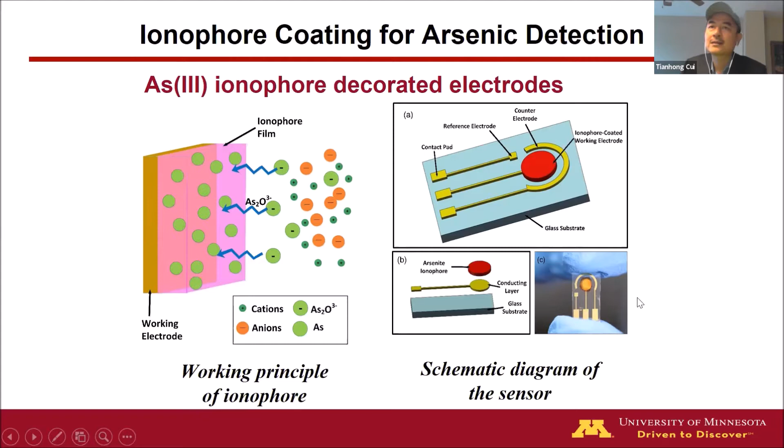We also built a smaller instrument connected to the sensor, which realizes wireless communication. We can put it in a set of water to detect and transmit the signal wirelessly, and then from a terminal like a computer remotely, we can get the signal from the lakes, rivers, or underground water, trying to check the arsenic concentration. My student and postdoc have been working on that.

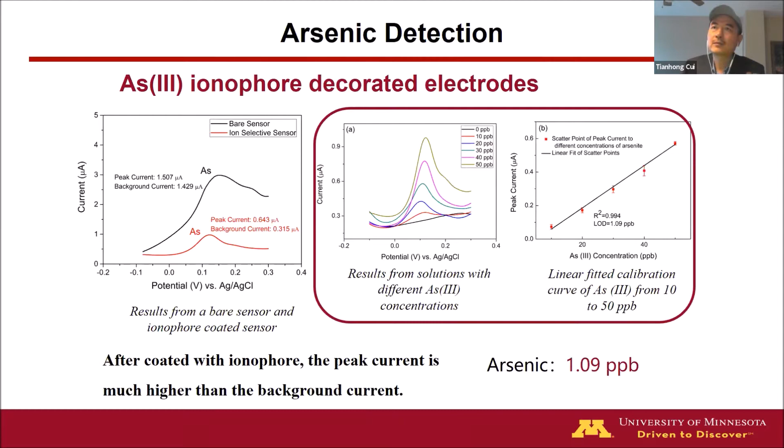We also develop sensors to detect lead and cadmium. This is especially relevant in the Midwest United States - there was a big problem in the past in Michigan, where about 500,000 people got affected because of lead release from the pipeline.

In our lab, we also do mercury detection. We did a lot of work because of a local problem in Minnesota, where mercury contamination in water is actually very severe. Mercury detection limit requirements are much lower compared to other heavy metals, and this is regulated by the EPA, so we need to try to get very good sensors for water detection.

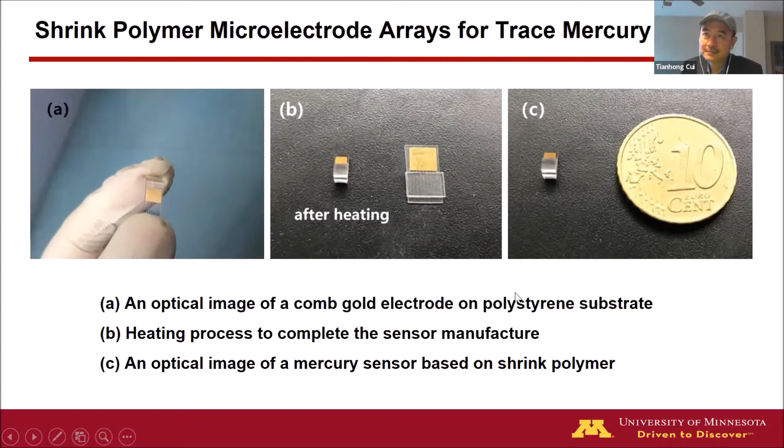Using this, we can do the detection. It gives us a few orders, 2 orders, lower detection limits. We can detect 90 ppt, that's parts per trillion detection limits. This is a very, very low detection limit that we can achieve for mercury using this technology.

Not only for mercury, we can also develop it for arsenic if needed -- we can detect very low concentrations using the sensor. This is actually something we've been doing for many years in the past.

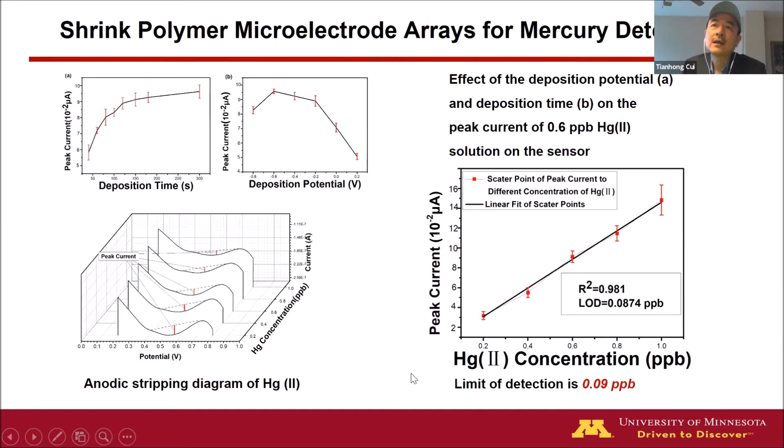In Minnesota, in addition to the Water Resources Center, we also have one of the best facilities, the Minnesota Nano Center, for micro/nano fabrication. It's one of the earliest and one of the best, sponsored by the National Science Foundation. A lot of local industry in Minneapolis uses the facility, and other academia, universities and research institutes also use it.

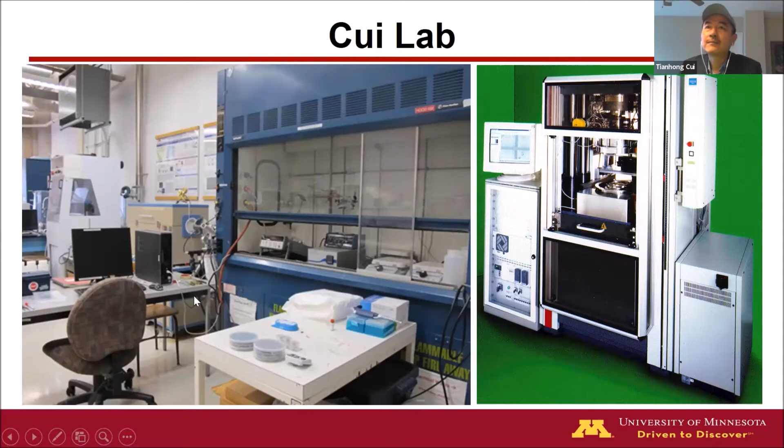So with this, I'd like to conclude my talk today. I think I may have a couple of minutes for questions. I'll get back to Kevin. Thank you very much for your attention.

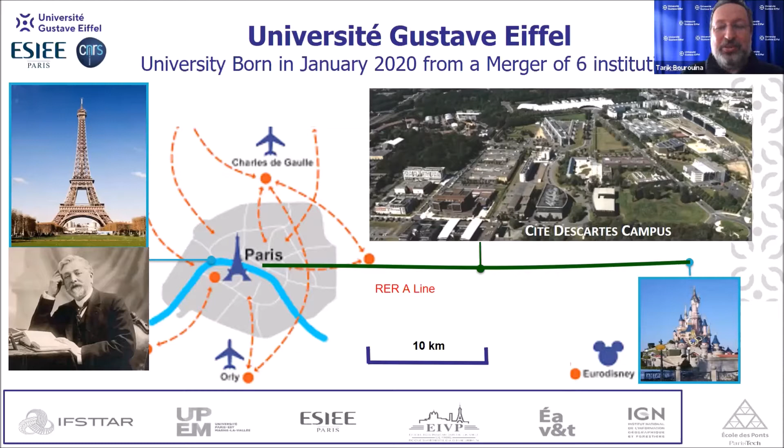I mentioned in my presentation that there are a couple of projects under the Future label, and Future stands for French University on Urban Research and Education. It received the I-SITE label, a national French program of excellence, and our flagship is inventing the city of tomorrow.

In a few words, the 3 pillars of our strategy are to contribute to the resource-efficient city, the safe and resilient city, and the smart and digital city. So there are a couple of interesting questions and a lot of opportunities for deep technologies, including micro and nanotechnologies.

We do have on our campus 2 world-class experimental platforms. One of them is dedicated to MEMS and nanosensor prototyping, the so-called SenSYS Connect IoT platform. On the other hand, we have a quite unique district-scale climatic chamber called Sense-City, which allows us to conduct experiments under controlled climatic conditions.

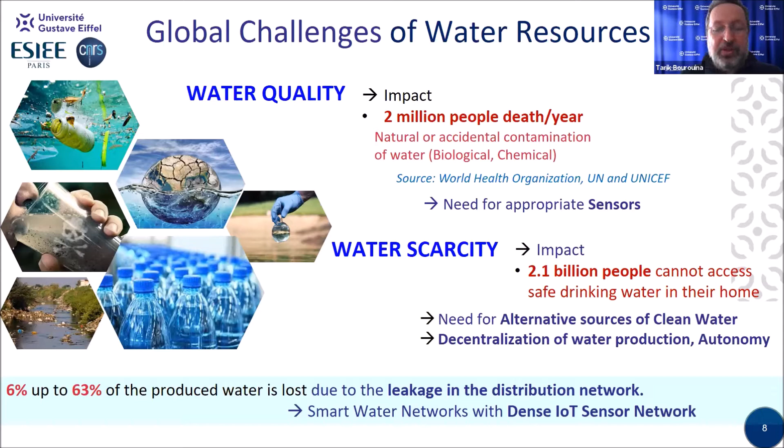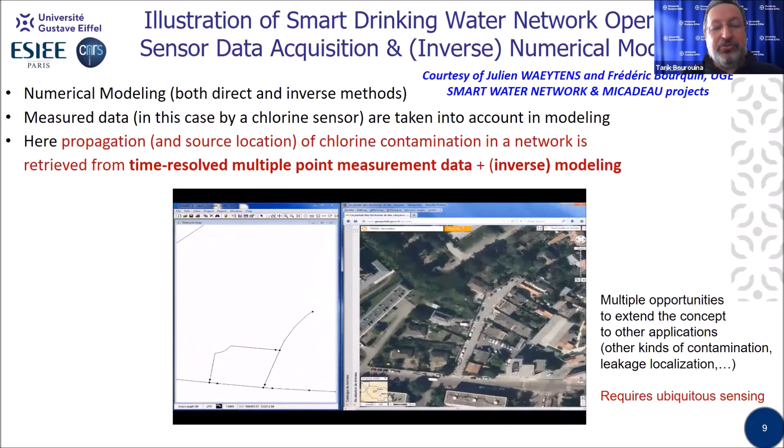So I'll give an illustration about what we can do. Just to give you a first illustration about the smart water network, consider a drinking water network. All the dots here, schematic dots, are sensors. Suppose you are able to put sensors everywhere along the drinking water network—here we take the example of chlorine sensors.

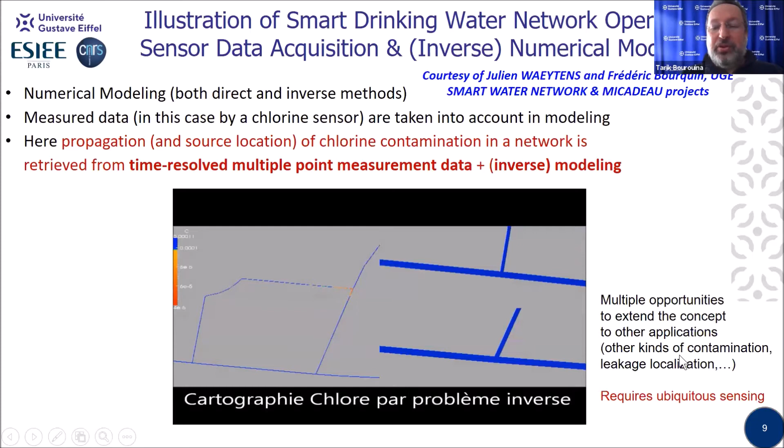By the use of data collected throughout the network, you'll be able to reconstruct the pollutant map. It can be time-resolved, and a water manager, looking at this kind of interface, can, for example, close the water here to avoid this chlorine contamination spreading through the water network. There are multiple opportunities to extend this concept to other applications, like contamination from other kinds of contaminants, and even the localization of leakage.

There was a European project just ended named Proteus, and the challenge was to develop multifunctional miniaturized sensors based on nanotechnologies. The goal was to provide a 25x reduction in cost, a 10x reduction in size, and multiple other capabilities.

Just to make it short, we came out with this unique sensor which is able to measure up to 9 different parameters. 4 of them can be very helpful, for example, to detect leakage: pressure, flow rate, temperature, and conductivity. Temperature is actually needed for all sensors, just for calibration purposes. Conductivity can be an indicator of contamination, and when we need to know exactly what this contamination is, there is a need for chemical sensors—so 9 parameters on a chip no more than 1 square centimeter, with a potential for cost reduction.

Just to give you an idea about the power of those microtechnologies: here, this is a single chip mounted on a sensor. Those kinds of chips can be produced using batch fabrication technology, so 20 wafers of these can provide you up to 1,000 chips, and then 1,000 sensors.

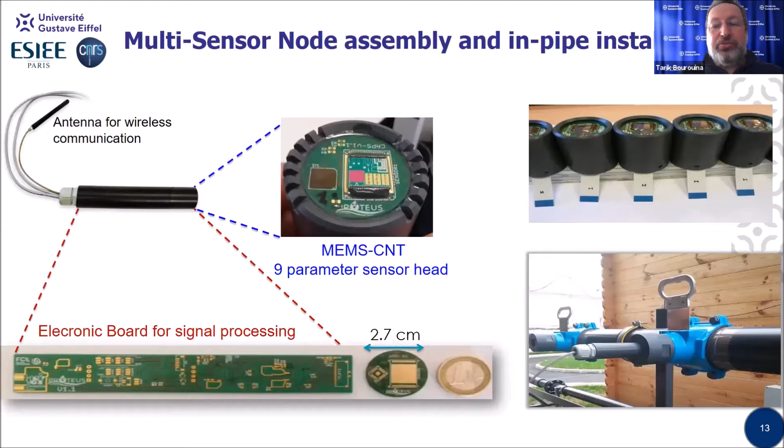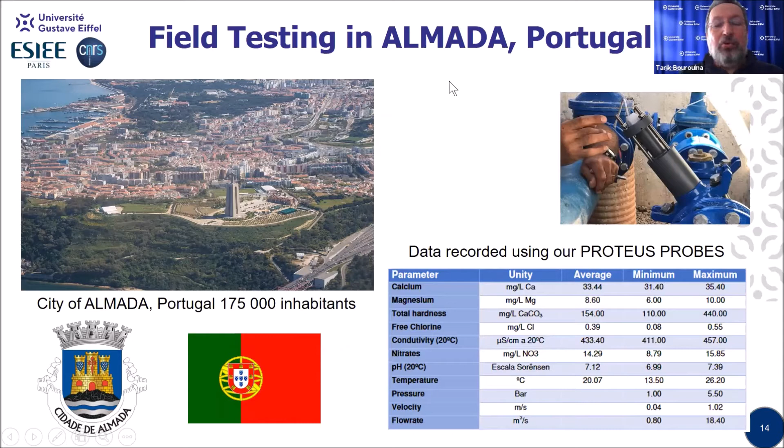So it's ease of deployment over a water network. In this project, we produced a lot of those sensors, and then we made the field testings. One of those field testings was conducted in Portugal, in the city of Almada, for the proof of concept and improving the TRL of this technology.

So I'll switch to a completely different topic, which is water contamination, not by chemicals. Up to now, we saw a lot of chemicals that are miscible in water. Here, the point is about particulate contamination, which includes biological particles and plastic particles. Among the biological particles, there's a need and opportunities regarding bacteria, but also protozoa. For plastic particles too, this has recently raised a lot of concerns, and we tried to address this issue.

From a technology point of view, when you consider micro technology, microfluidics, and so on, there's an opportunity when you look at the characteristic size of bacteria and protozoa. They lie between 1 micron and 10 microns in dimension. Viruses, though, are really a challenge—if you need to consider them as particles, that's definitely another story.

But for bacteria and protozoa, one attempt was to actually capture those bacteria in a kind of mechanical filter in a microfluidic channel, and then observe those bacteria through a microscope while mixing the fluid surrounding the bacteria with very well-known liquids. The idea is to match the contrast when doing this mixing, so as to achieve a perfect match.

So then the next topic is protozoa. They are much bigger than bacteria, and can be observed through microscopes or other imaging techniques. As you can see here, we have different types of protozoa like Crypto and Giardia, and images of other contaminants which are non-biological.

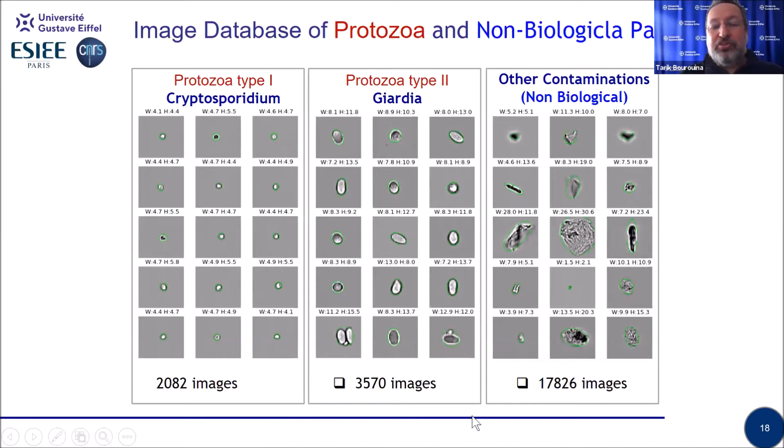So here we can understand that there's room for identifying and recognizing these types of biocontaminants, just like we're able to recognize the difference between a dog and a cat. Here we'll be able to recognize the difference between Crypto and Giardia just through proper observation and image processing.

This is what has been done with a colleague from NTU in Singapore, and with contributions from other French colleagues who are experts in image processing and deep learning. The idea was to collect a large number of these particles using an instrument widely used in biology for cell screening, called flow cytometry. It's used for cancer cell screening, blood cell screening, and so on.

But here we just exported this technology and used it for water analysis. And the particles here are no longer... actually they are cells, biological cells. And we're able to construct a huge database. Through learning techniques, we're able to establish clusters to identify whether it's Giardia, Crypto, or non-protozoa particles.

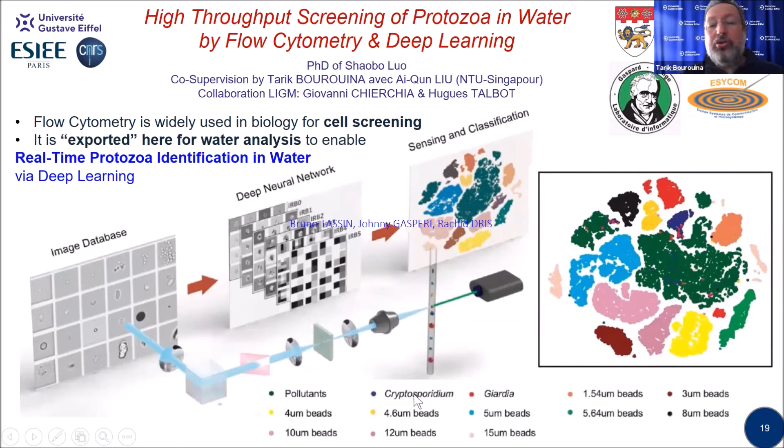Okay, so the next topic is microplastics. There are recent reports showing that bottled water actually contains a huge amount of microplastics, much more than tap water. This raises concern about whether it might impact health or not. Those reports are totally ignoring the smallest particles, those below 10 micrometers in size, which suggests the number could be even much bigger. So this is also an opportunity for us.

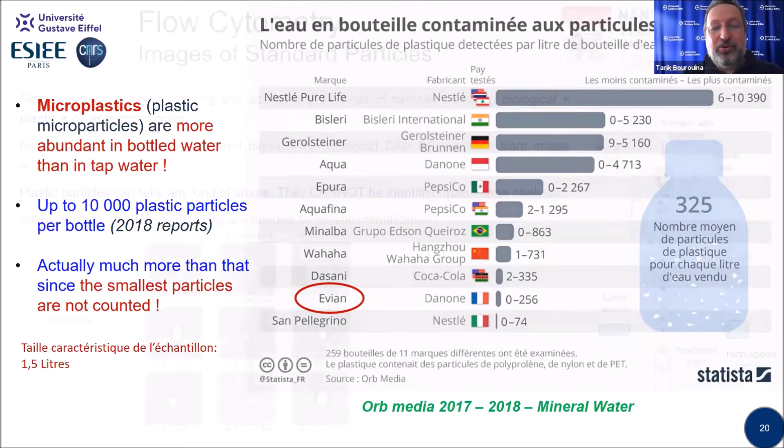But contrary to biological contaminants, we cannot recognize plastic just by looking at it, because plastic can take any shape. You can't tell, okay, I recognize this as plastic according to its shape. So there's a need for an alternative identification technique. We can count the particles, but we can't identify them like we did with biological contaminants. So this identification is done through optical spectroscopy.

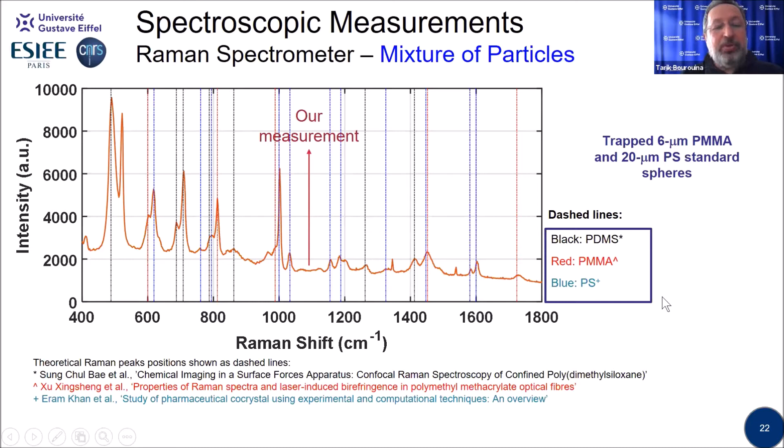If we are able to implement optical spectroscopy, then we will be able to tell, okay, this is a characteristic spectrum of polystyrene or PMMA or PDMS, and this is what we used. Either Raman spectroscopy or FTIR spectroscopy can be very useful for this identification. So that's what we did.

So we used a microfluidic chip in order to concentrate all the particles so that they all gather in this reservoir, no more than 90 micrometers in size. And just by spotting here, we were able to see the nature of those particles, to tell whether

it's plastic or not and which type of plastic they are. There are also multiple capabilities that can be implemented in a microfluidic chip, like size sorting. So we get a series of reservoirs, and each of them will be related to either small particles or big particles. And then again, we'll be able to analyze by spectroscopy to tell what particle it is for the bigger and what particle for the smallest.

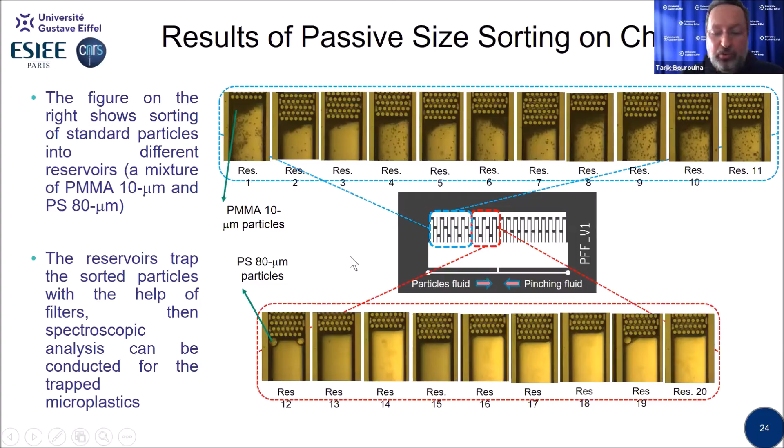There is also a spin-off company that emerged from the university. It's called Isonics, and it just launched a few months ago.

If I may have time, I'll just speak a little bit about water purification that was mentioned by Professor Tianhong Cui. So we implemented a couple of techniques. One of them is photocatalysis. And this was just a demonstration of

integrating a nanomaterial, which is zinc oxide nanowires, inside a microfluidic chamber. The idea is that this microfluidic chamber is no more than a few centimeters square in area, but inside it incorporates small features, much smaller. The idea is to inject dirty water here, and from the outlet we will get purified water.

So how can this work? It's a UV light illumination which will actually enable photocatalysis to take place here. And because of the tiny channels in the microfluidic chip, this photocatalysis can be much faster than if we conduct it in a beaker on the macroscopic scale. So in only 5 seconds of transit time, we were able to demonstrate that 95% of VOCs diluted in water were destroyed, and water was purified.

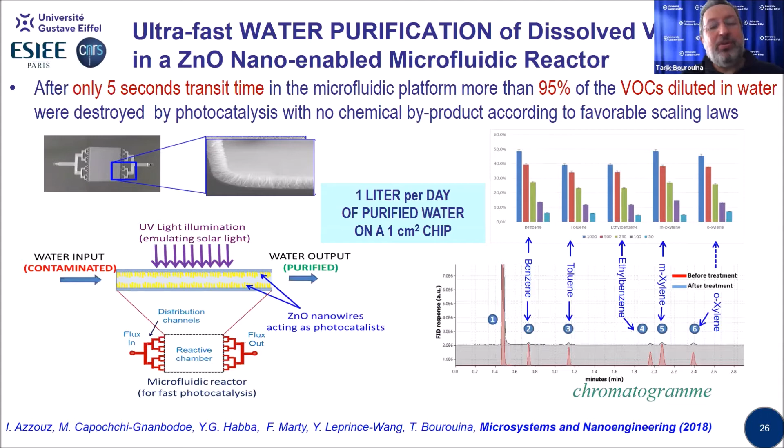Also interesting is the order of magnitude of how much water you can purify with such a very small microfluidic chip - it can be up to 1 liter per day. So even though it's very small, it can do this. It's just an exercise - we will not provide a commercial product from that, but it's just a demo of co-integration of functional nanomaterials in a microfluidic chip for the purpose of water purification.

Another emerging technique for water purification is steam generation. Basically, if you have dirty water, you just evaporate it and collect the evaporated water, which is expected to be much cleaner. Enhanced solar steam generation involves this kind of material.

This kind of material is porous, and it just needs to be put on the surface of the water. The purpose is to enhance the heating of the water so that it will be concentrated only on the top. As you can see, if you compare this photo and this photo under the same illumination of sun, the surface on the right side is much hotter than if you don't put anything on the beaker - 28 versus 56, and 56 will lead to faster evaporation.

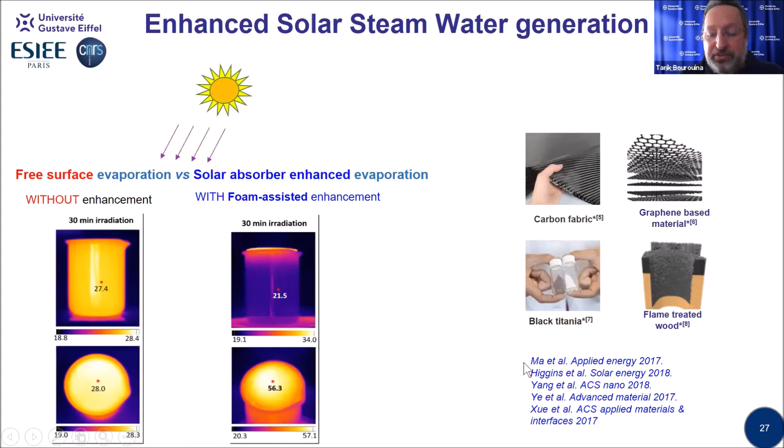There are a couple of materials that have been reported in the recent literature on this topic. We came out from our side with a kind of optimized material, which we call the meta foam - a foam metamaterial. What you can see here is this metamaterial, where we control the pores, the size of the pores, the periodicity, and so on. It also has a very high absorptivity of sunlight.

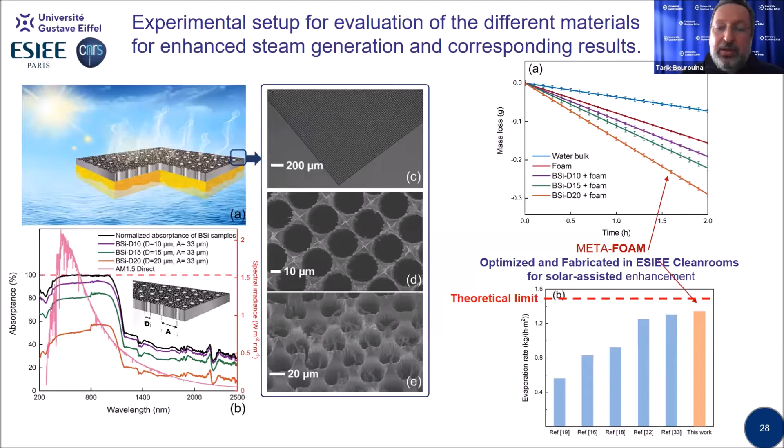Here, as you can see, these are our results compared to results reported in the literature. We are above state of the art, and we are quite close to the theoretical limit of the evaporation rate under one sun illumination.

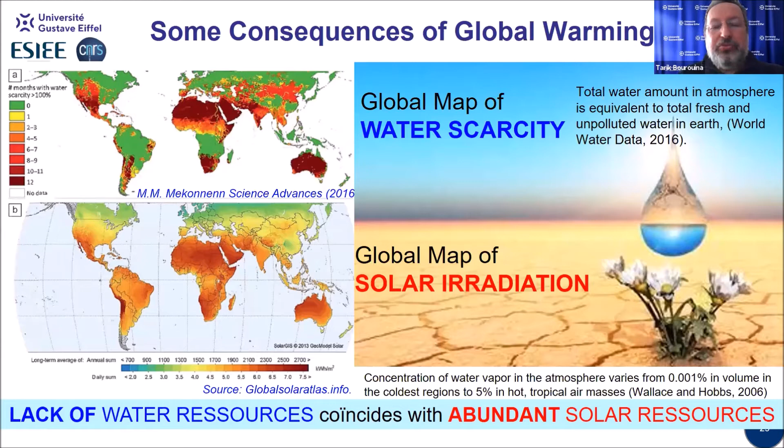Maybe a very last topic is about collecting water from the atmosphere - dew water harvesting. If you consider regions where there is almost no water at all, like deserts and arid regions, there is still an opportunity to collect water, like these insects do. There is a huge amount of water available in the air, and it requires efficient water harvesting

technology. So we have had the chance to have as a collaborator Daniel Beysens, and we have been working with him together with Tianhong Cui, actually, and the postdoc that was recruited in the Chair Blaise Pascal of Professor.

Tianhong Cui was working on this topic, and we established this collaboration with Daniel Beysens, who is also the president of OPUR, an organization for the use of dew water. I'm making some advertisement for his recent book on this topic. Prof. Daniel Beysens had a lot of experience implementing dew water harvesting plants all over the world, providing resources for people who have limited access to clean water. So we came out with this idea.

How about if we think about water panels that look like solar energy panels made of silicon, but instead of harvesting energy, they would harvest water from the atmosphere.

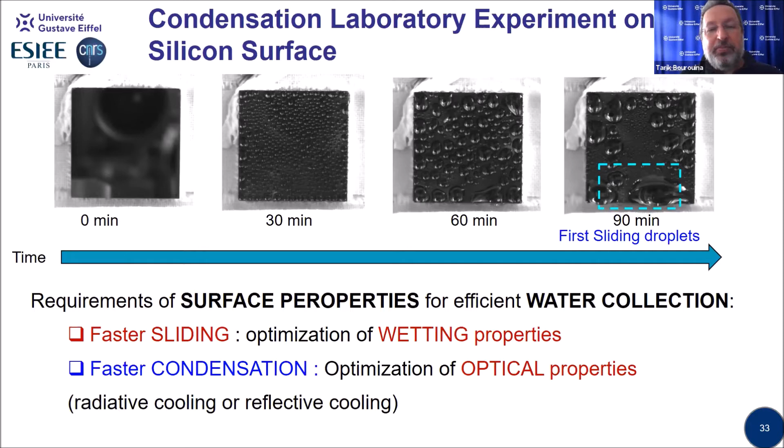So we studied this material based on silicon. It's called black silicon. It has unique properties, both optical, because it absorbs light and then emits light, so it has high emissivity, which is required for radiative cooling. Cooling is required for evaporation, for condensation to take place. It also has faster sliding, which allows the water to be collected, not just stick on the surface. This photo shows that black silicon is really black, and that its wettability is really exceptional.

So these are all our partners on the Nano for Water program. It's an open academic research collaboration platform. If anyone has interest in this topic and would like to contribute, you are very welcome. And that's it, thank you very much for listening.

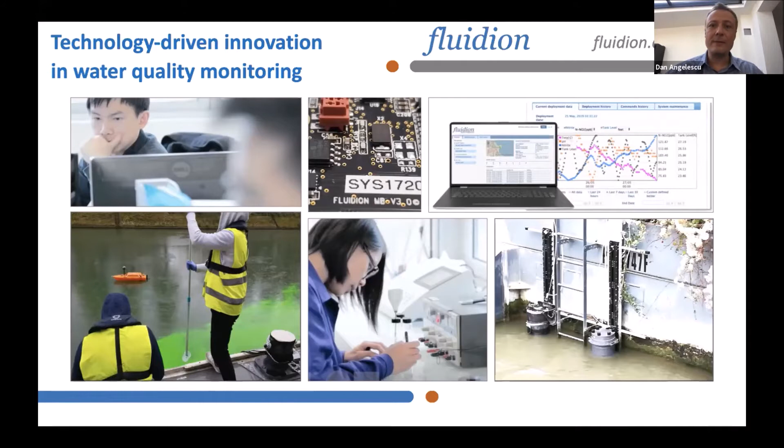So I'll first talk about in situ microbiological quantification. You're all aware that our rivers carry not only the water that melts from the mountains, but they also carry our poop, our wastewater. That's usually the water we drink and the water we use ends up in the sewers. It's treated, and then it's generally sent back either in coastal waters or in rivers, which carry it to the sea. Then it evaporates and the cycle replenishes itself.

So obviously there is a risk associated with that, so that water needs to be properly treated, but even the best treatments still leave some bacteria in the water. It's really important to be able to monitor for these bacteria and other pathogens, because this really tells you whether that water is safe for use, either for bathing or for potabilization. We've developed a brand new product that just came out, the second version of our in situ bacterial analyzer. This analyzer uses single-use cartridges - they allow taking a sample to do a full measurement.

They contain the reagent, and we do 3 types of optical measurements over time during incubation. This allows us to deploy systems like what you see here in the Paris area, in the Seine River. So we can deploy such systems that perform measurements automatically, and get E. coli measurements every day in the Paris area at multiple sites. We've been getting multiple points a day for the past 5 years. And now we're doing this a little bit all over the place, also in the United States, in Los Angeles, in Massachusetts, in Washington State, in New York City, etc.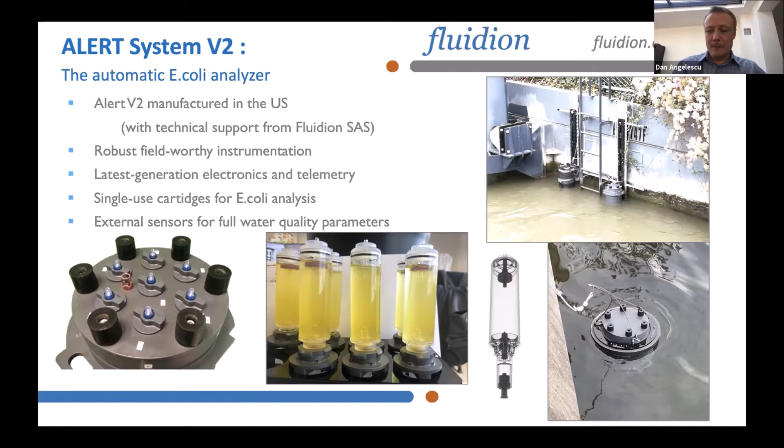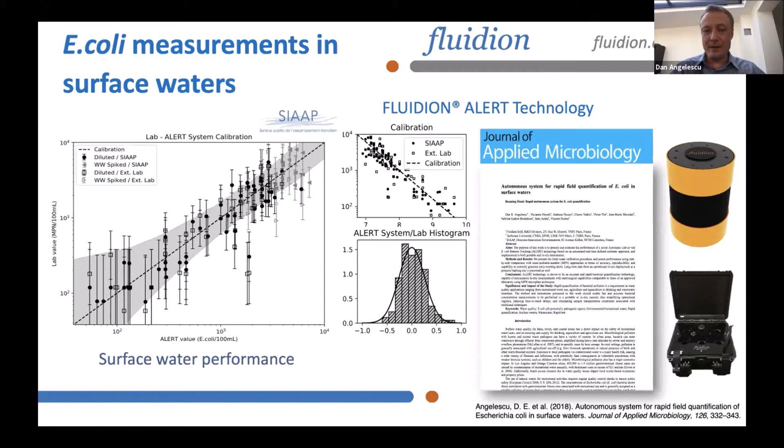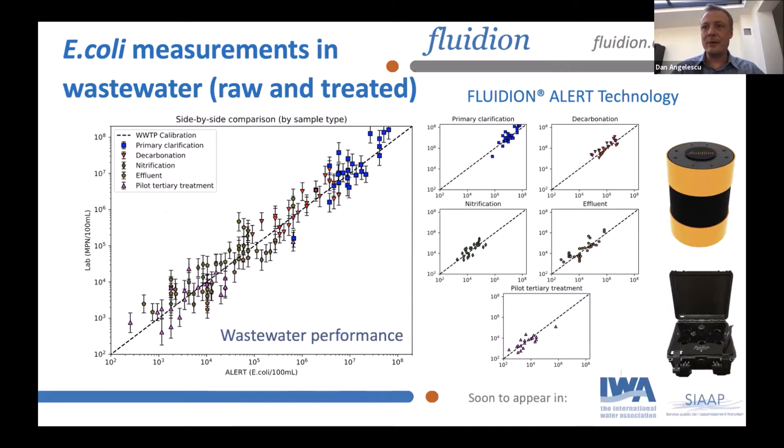So with this data, we do a lot of studies to try to make sure that these sensors work well and that the data they provide corresponds to the data from the lab. And now we're at the point where actually it's so accurate that it's as good as the lab. That took us a few years to get to this point, but now, using the latest technologies we've developed, we can reach actual accuracies that are similar to the lab.

So these sensors have been used by a number of clients and organizations. In this case, it's the California Water Quality Regulator, the California Water Quality Board of San Diego, that uses our system to get measurements in the Tijuana River. The Tijuana River comes from Mexico and then goes down and comes into the sea near San Diego. The problem is that it's extremely polluted, and there are a lot of canyons where raw wastewater gets into that, and that's very difficult to treat. So you have to figure out how to do that, and you have to be able to monitor that in order to give early warning and close the beaches when there is a lot of pollution coming.

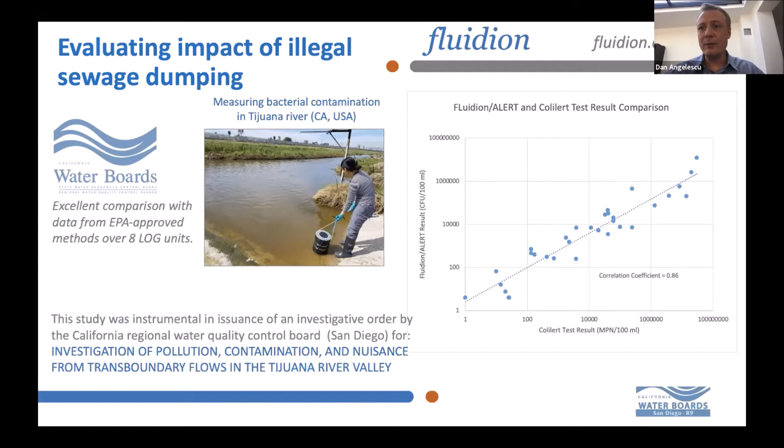So the California regulators have used our system to do that, and the data looks really good. Basically, it correlates well with lab data over 8 orders of magnitude.

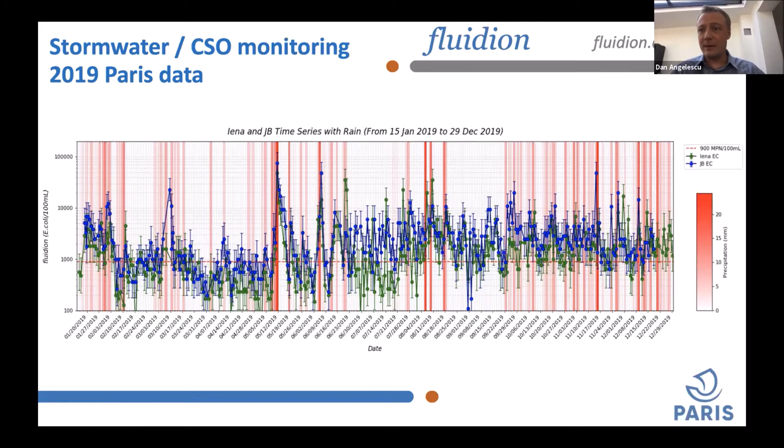So this kind of study is, for the first time, allowing the city of Paris to actually see with the sensors how long such a pollution event can take. And it turns out sometimes it can pollute the river for close to a week. So we can provide this data in a quantitative way and allow the management of all kinds of activities, including the bathing in the summer in the canals in Paris at La Villette.

So it's going to be recycled locally. We help this kind of big city projects to be accomplished and to provide a risk assessment of how well the disinfection is done before that water is being reused.

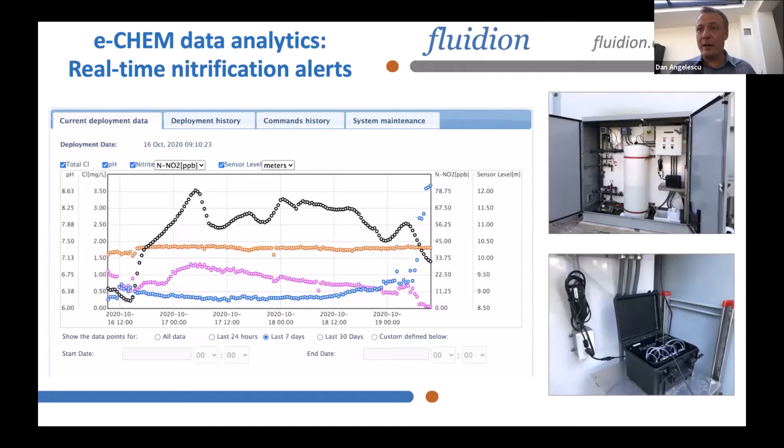You can watch the data from the sensor coming online on our platform in real time. In this case, we watch a nitrification event live. In blue is nitrite concentration measured every half hour by our analyzer. Over the last few hours, nitrite concentration goes up from about 10 ppb to around 80 ppb, and chlorine concentration drops. This means there's a bacterial bloom that produces nitrites, consumes the ammonia, and then consumes the chlorine as well. We can detect this in real time over a long period.

This is a one-year deployment, and in red are the early alerts we've given, shown against the nitrite concentration. We're able to detect every single nitrification event that happened in this tank and provide early warning, sometimes up to two weeks before the tank was actually treated by the utility. So we can improve water quality for over 30% of the time in a situation like this. That's great value for utilities, especially in warmer states, but nitrification happens up north too.

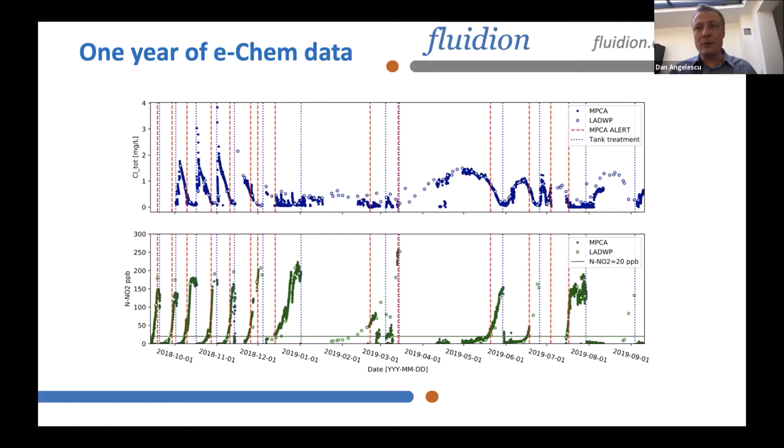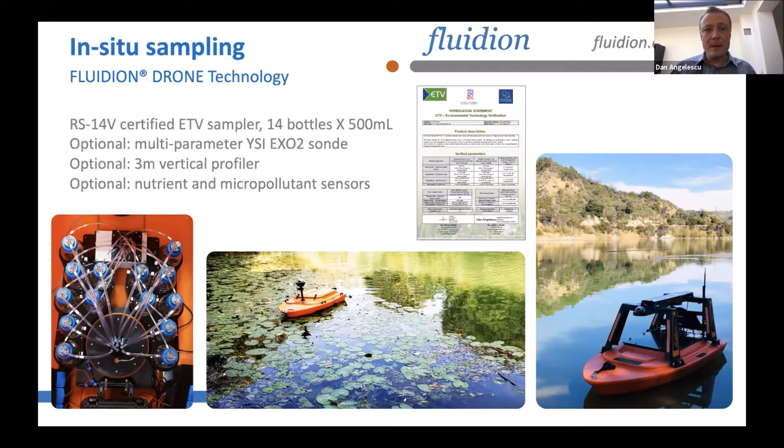It's currently being used by utilities in both France and the United States, and it's starting to spread throughout Europe. With that, I'd like to thank you very much for your attention, and I'll be taking any questions you have. Thanks.

Well, thank you very much, Dan, for your presentation, and it's great to see that the work being done, the research being done in labs are able to be deployed with the cooperation of, with the partnership with the cities and to see all these technologies.

I see one question from Vijay Jagannathan, who was asking about the opportunity to access green funds to maybe bridge any viability gap in the development of technologies, and I'm not sure if you have some thoughts about that.

I'm not sure what green funds are exactly, but we do apply and develop this technology thanks to a lot of grants we have received over the years. For some technologies, we received grants from the French government, for the French company. And for specific technologies critical to the US situation, like this chloramination monitoring, we received a grant from the US government, through the National Science Foundation. So yes, we try to reach those grants through scientific excellence as much as possible, and by providing technologies that are needed and vetted by specialists and reviewers. But I'm not sure what green funds are specifically. I hope that answers the question.

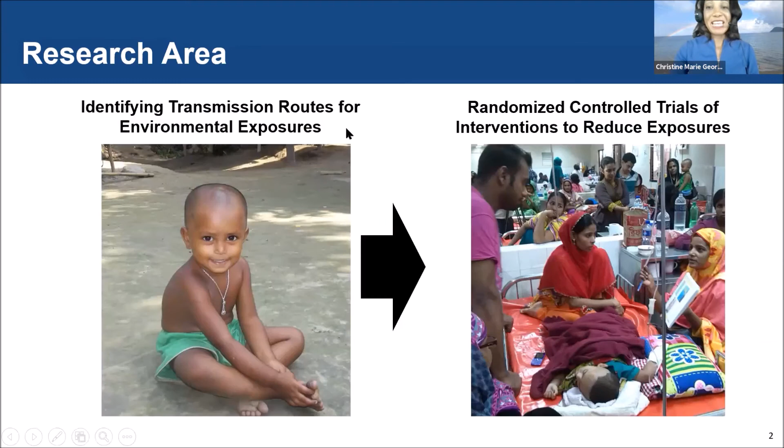I currently direct studies in 3 different countries. In Bangladesh, I focus on approaches to reduce diarrheal diseases among susceptible pediatric populations, particularly in a hospital setting, because often when a patient comes to the hospital with diarrhea, their family members are at very high risk of subsequent infections. For diseases like cholera, it could be 100 times higher. So our emphasis is on how we can intervene in these high risk settings to reduce exposures to enteric pathogens for young children.

We also utilize mobile technology to send behavioral recommendations. I think my internet's unstable, so I'm going to switch over to a different connection. Give me one second here. All right, I'm back. Kevin, can you confirm that you can hear me? Yes, Christine Marie, I can hear you.

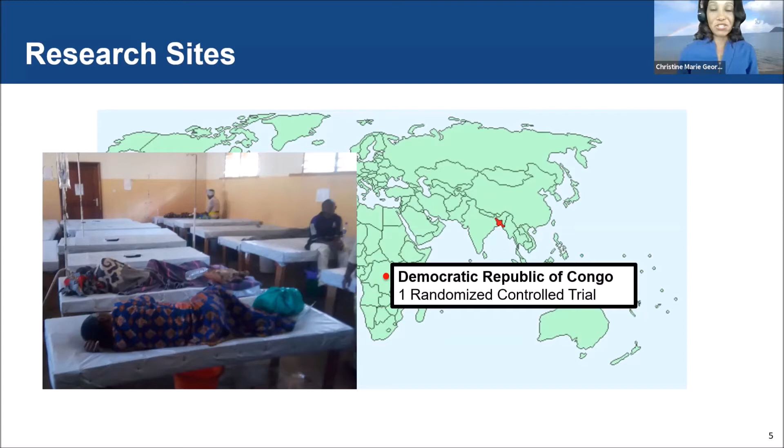So in Bangladesh, we focus on strategies to reduce enteric diseases among young children. And in the Democratic Republic of the Congo, we focus more on cholera. We work in South Kivu, which is the area endemic for cholera. Cholera is a severe diarrheal disease that, if left untreated, can result in death. We partner with communities as well as the Ministry of Health in South Kivu, DRC, to develop community engaged water treatment and hygiene interventions to try to reduce the number of diarrhea patients coming to health facilities in this setting.

For today's presentation, I'll focus on our work in partnership with the 3 tribal nations in North and South Dakota. The rationale behind this study is that in the US, it's estimated there are over 2 million individuals exposed to levels of arsenic in drinking water that exceed the Environmental Protection Agency guideline of 10 micrograms per liter.

So this is a large number, and to the greatest extent it's naturally occurring in groundwater aquifers, but you also have industrial inputs such as mining that could also be contributing to elevated arsenic exposure.

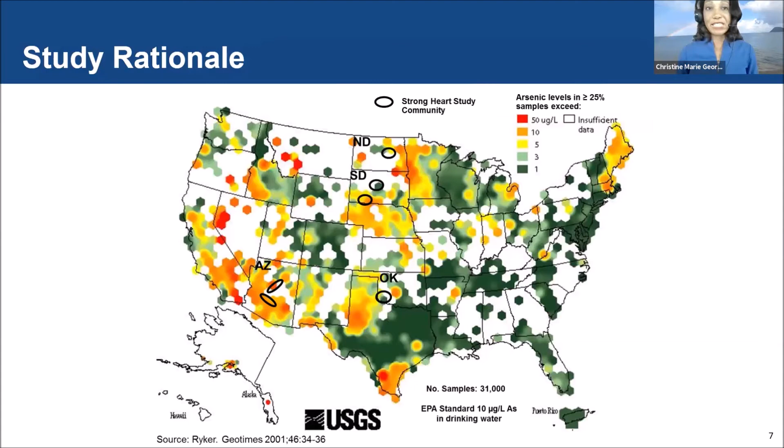Through the Strong Heart study, it was identified that chronic elevated arsenic exposure in these American Indian communities was associated with an increased risk of cardiovascular disease, as well as cancer mortality of the lung, prostate, and pancreas, diabetes, and kidney disease. These findings, which demonstrated the health implications of chronic arsenic exposure in this population, led to the need to develop community-driven approaches to reduce arsenic exposure.

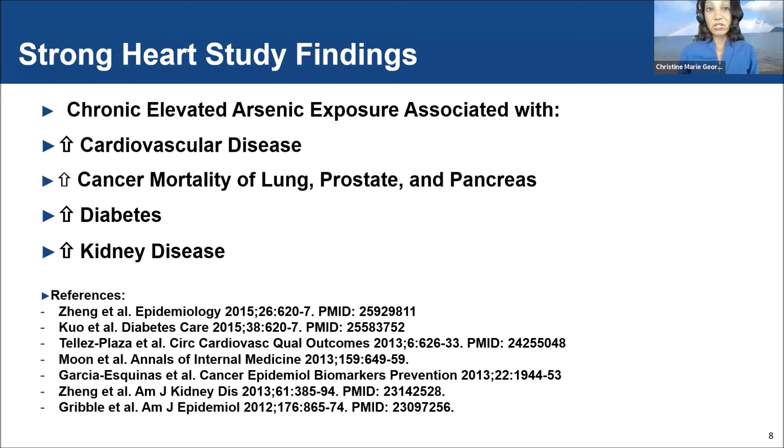My colleague, Ana Navas-Acien, and I submitted an R01 grant to the National Institutes of Health to implement interventions in partnership with communities to reduce exposure. This grant was funded, and it's a 5-year project. The objective is to develop and evaluate the effectiveness of participatory interventions to reduce arsenic exposure among private well users.

Our focus was in the Strong Heart study communities in North and South Dakota, because these were communities that to date had not received arsenic mitigation interventions. When talking about arsenic, I should also note that arsenic naturally occurring in the groundwater aquifer most highly affects rural communities across the US, and in particular private well users. Private wells are not regulated by the Environmental Protection Agency, so the onus is on the private well user to ensure that their water is safe to drink. This means the onus is on them to test the water as well as have water treatment technologies.

This presentation today really ties into the other presentations in terms of the technologies that were presented to be able to detect compounds in drinking water. In particular, there's really a need in our communities for technologies that community members can use themselves to test for pathogens or heavy metals in their drinking water.

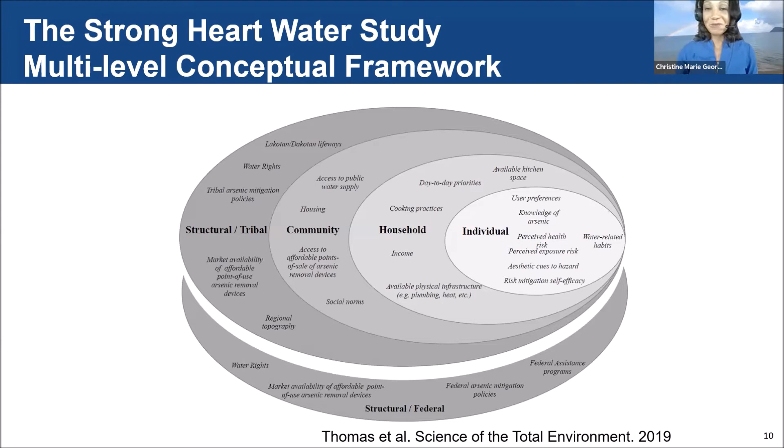The first aim of the Strong Heart Water Study was to develop a sustainable participatory arsenic intervention through formative research and community engagement. This was initially implemented through a series of in-depth, hour-long, open-ended interviews with private well users, elders, and community leaders, to learn about the priorities in the community related to water and the preferences for interventions.

This same approach was taken in our community workshops, where we brought the same group of stakeholders together to design an intervention. The intervention shouldn't be coming from the professors or the researchers, it should be coming from the community. These approaches facilitate community discussion, and through them we developed our intervention and then our pilot.

I'll briefly describe our community workshops. This is a photo from our first one. We had community elders, private well users, and community members who worked at the Environmental Resource Department and the Water Resource Department. Through these discussions, we were able to identify the community priorities related to water.

There were a series of ranking exercises where community members voted on what issues they thought the focus should be on. For water-related priorities, something really important in the community was around water testing, and in particular the communication of water testing results. Communities reported that people had come in, tested their water, and either never provided the result, or provided it in a way that they didn't know what to then do about it.

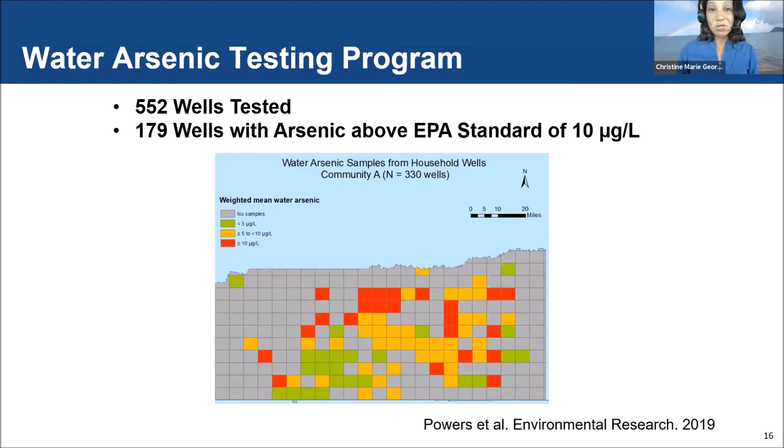If a household was found to have elevated arsenic through this program, we then called them to let them know, and we sent a mailing with their results.

Beyond just arsenic, this was an area where there was elevated uranium present, so we also did uranium testing as part of our program. To give you a sense of the cost, to test arsenic and uranium in drinking water was around $30 US, so it was expensive. If a water sensing technology could be implemented at a lower cost, that would be really valuable in this setting. We also sent out a mailing again to emphasize the importance of proceeding with receiving an arsenic mitigation option.

As part of this program, conducted in partnership with Indian Health Service, we installed an arsenic removal device, a point of use arsenic removal device, in households that were interested. This is an adsorptive media filtration system, and this particular model is from MultiPure. At the bottom under the sink, you can see the cartridge is installed there.

On the top of the kitchen counter is a filter faucet, and only the water coming from the filter faucet is arsenic safe, not the water coming from the main kitchen faucet. This is important in terms of a behavior change intervention or health promotion program to remind people to always use the filter faucet. The flow rate is slower for the filter faucet because it has to pass through the filter, so people may become frustrated and switch over to the kitchen faucet.

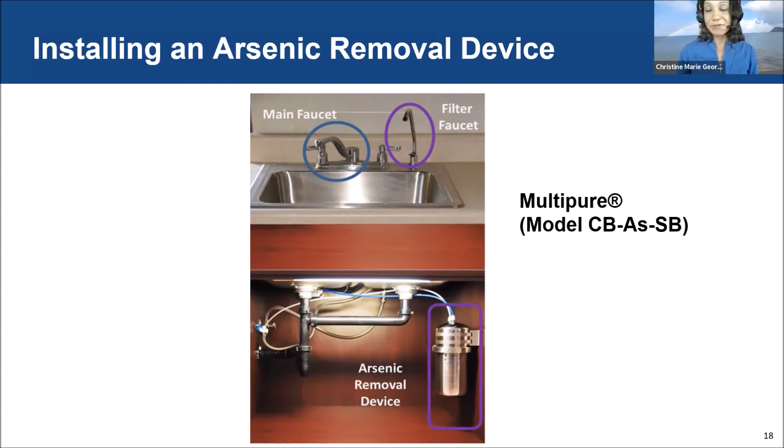Accompanied with the filter itself, we had a series of videos developed, including testimonies from elders in the community on the importance of arsenic testing, as well as the need for having an arsenic removal device installed in the home. We had households, including the children who were on the video, talking about how they're using a filter faucet and how they navigated challenges, for example preparing big meals, and how they were able to accommodate that.

We also provided promotional materials to remind them to use a filter faucet, including cups and mugs, and a tanker to store water for when they had to make big meals, so it was easier.

A very important aspect of the intervention was maintenance of the device over time, since cartridges don't last forever. So we included an indicator light on the filter faucet that flashes red when it's time to change it, so households knew. We also accompanied this with a video of a community member changing the arsenic removal cartridge to explain to households how to do this.

We've been really fortunate that we've been able to continue our study through the COVID pandemic. Initially we had done home visits in these households, and now we've accompanied it with phone calls to households and text messages.

We're also using Facebook as a tool to engage households. These have all been very valuable platforms to engage households virtually through the COVID pandemic.

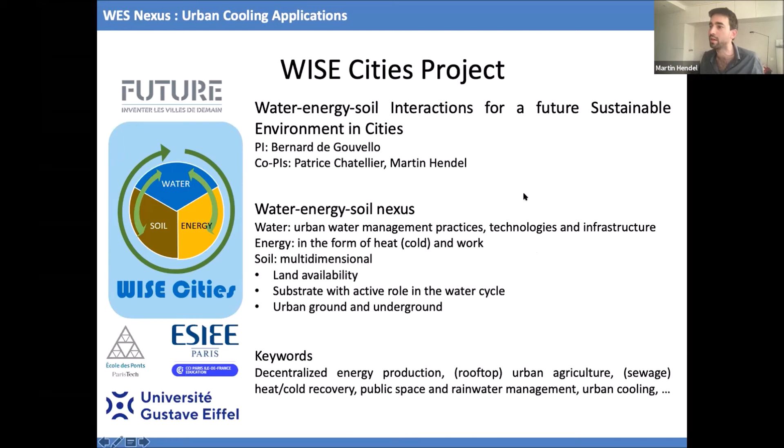The main question we're trying to address is how urban water management can contribute to sustainable energy production and land use. So it's looking a lot at the multifunctionality of infrastructure and practices, and how people do it themselves.

A brief project outline would look something along these lines. We've got a state-of-the-art of water, energy, soil nexus applications, which I'll go over briefly. We've got two work packages looking in detail at sewage waste heat and cold recovery at the building or district scales, involving field measurements.

In the pilot experimental setup we have at Université Gustave Eiffel called Sense City, there's also simulation work into how heat recovery works from a physical, heat transfer standpoint. We've also got a big part about how alternative rainwater management practices affect district or urban scale water catchments and water pollution.

The last part regroups urban modeling and simulation of environmental performance, depending on different scenarios involving the water, energy, soil applications we're going over. So the project is really cross-sectoral and interdisciplinary—we've got sociologists, hydrologists, engineering scientists, and so on.

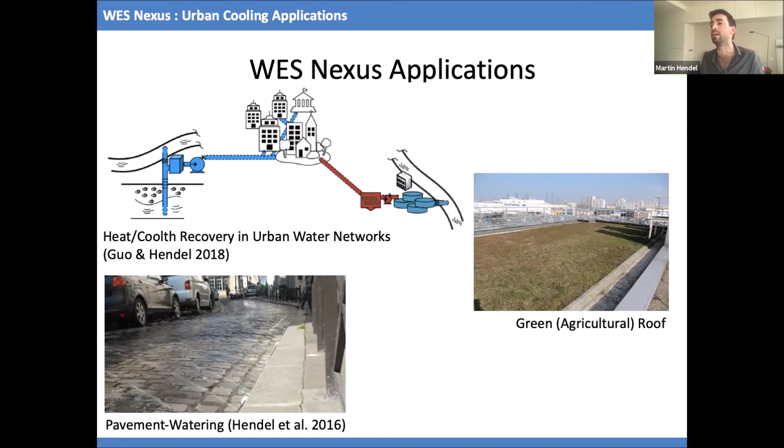Before I get into the details of what pavement watering is, I want to talk about why we discuss urban cooling and what the urban heat island effect is. You may have heard that cities are affected by something called the urban heat island effect.

This is basically the observation that city centers are warmer than their rural or unurbanized surroundings. This has nothing to do with topography necessarily or anything else—it's the same climate. This effect has been known since the early 19th century, first observed by Luke Howard in London, and shortly thereafter in the rest of Europe and many other cities around the world.

For a city such as Paris—but this is true for London, true for any number of cities comparable in size, so tens of millions—the order of magnitude of the difference you'll observe between the city center and rural areas is around 3 degrees Celsius. You can just multiply that by 2 offhand, so it's about 6 or 5 degrees Fahrenheit.

Warmer on average in the city center compared to the rural or unurbanized area, and this is purely the effect of the presence of the city and everything that goes on in it. We'll get into the details. So 3 degrees Celsius or 5 degrees Fahrenheit, that sounds fine. In the winter, everybody's happy to be doing less heating, right? The issue arises when we're talking about summertime periods, specifically heat waves.

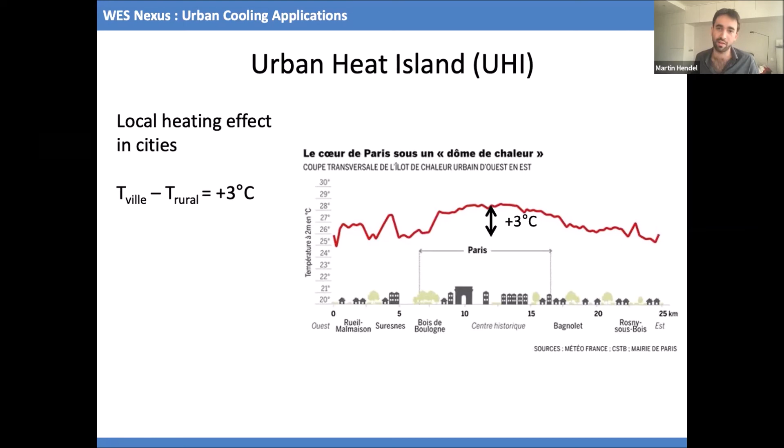So for Paris and Western Europe, which was very hard hit during the 2003 heat wave, the amplitude is not 3 degrees, it's more like 8 or 10. 10 is definitely not rare when it's clear skies, low wind speeds, especially in summer. So 10 degrees is a big difference. And during the 2003 heat wave in France, 15,000 people died.

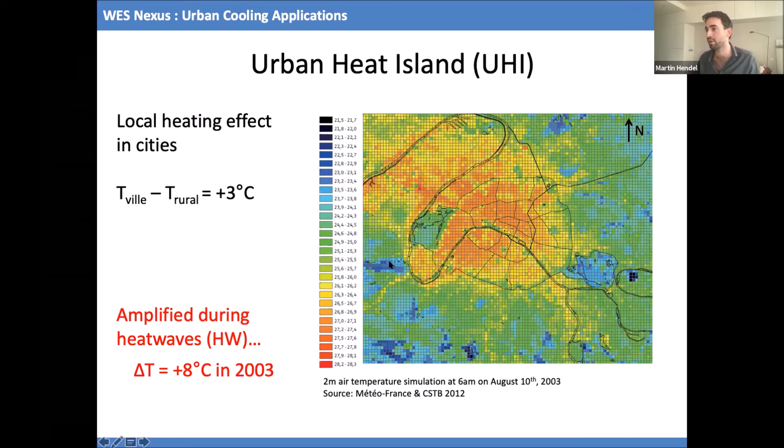So what creates urban heat islands? There's a number of causes. I like to list them this way. We have something called radiative trapping, which is mostly due to 2 factors.

It's the shape of streets, how buildings or how we build cities. So we usually have a street with buildings on either side, right? And this is called, in urban climatology, the urban canyon, because basically pedestrians are at the bottom of the canyon and the walls of the canyon, or the cliff, is the buildings we've built. So we're all cliff dwellers in this analogy, and pedestrians are at the bottom.

The other big issue is lack of evapotranspiration. So that's the lack of green space, soil sealing, impervious surfaces in general. Evapotranspiration is the evaporation of water by vegetated surfaces. So plants, when they do photosynthesis, are using water. The leaves are pervious to gas exchange, and so in the leaves, you've got evaporation taking place. And as everybody knows, when they've seen themselves sweat in the summer, evaporating water off a surface cools it down.

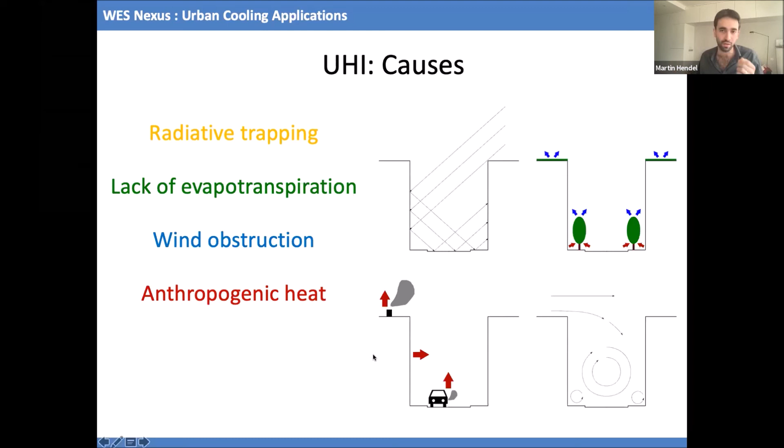So when it comes to solutions or answers in terms of urban cooling techniques and urban heat island mitigation solutions, basically you're going to be addressing each of these mechanisms.

So for radiative trapping, usually you try and increase the reflectivity of urban surfaces. Pavements, asphalt concrete pavements, are typically not very reflective because they're very black and dark colored. It's also true for the rest of the solar spectrum. So something you can do, and it's done in the US, for example in California under Title 24, is to promote cool roofs, cool surfaces that will reflect a lot of that heat away.

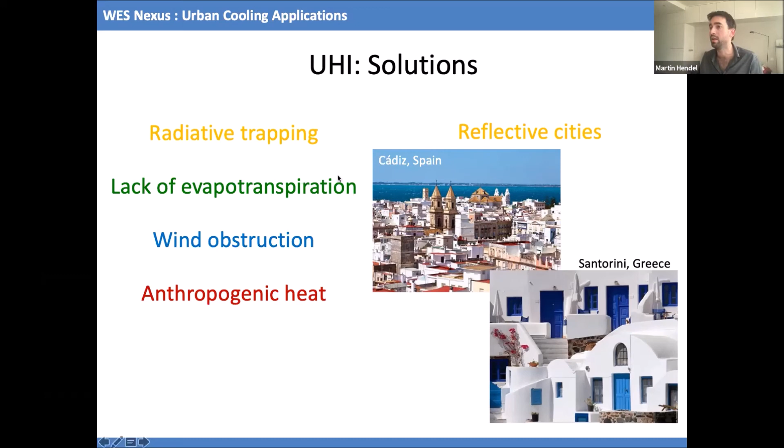Everything related to urban greening will help, because all that extra greenery and water availability that you're creating will promote evaporation of the water, which will increase humidity but decrease the air temperature. So depending on the climate, this will work more or less. Typically, the more tropical or subtropical you are, it will help, but in certain situations it can increase humidity beyond comfortable levels.

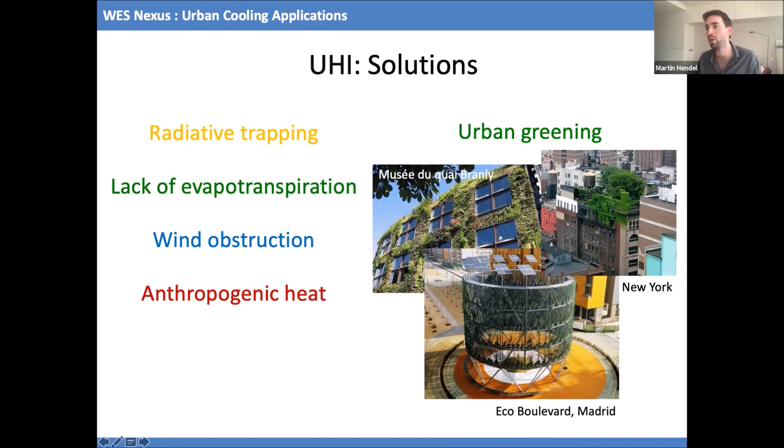Wind obstruction is something that's been looked at a lot, specifically in Hong Kong. Problems with urban ventilation were closely tied to the SARS-CoV-1 epidemic back in 2002, so they've done extensive work on how to promote urban wind permeability. I think one of the big clusters for SARS-CoV-1 was two of these buildings being very close together, basically one apartment block on one level contaminating neighboring towers because of poor ventilation. That was a big issue they've done a lot of work on. A few European cities are working on it too, also on the grounds of ventilation and air quality.

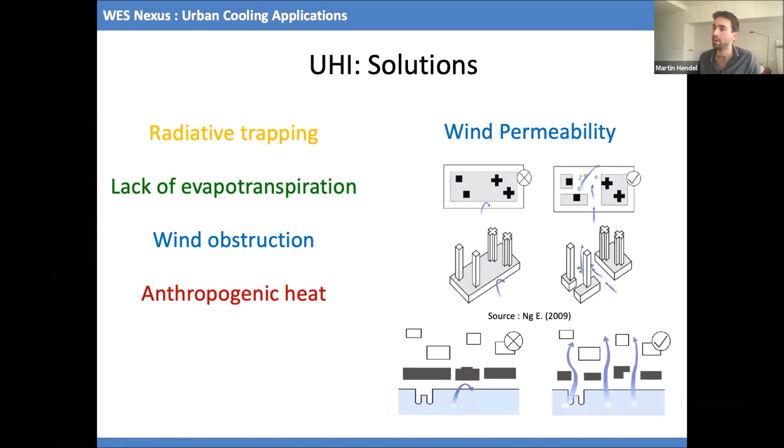And then for anything related to anthropogenic heat, any measure that's going to promote energy efficiency, the less energy you use, the less heat you will automatically be creating or injecting into the urban fabric.

You can also, when we're talking about air conditioning, switch from air-cooled air conditioning units to geothermal, or here this is Paris. Paris has one of the largest European urban cooling district systems, where the cooling is provided by the river. Because the specific heat capacity of water is way bigger than that of air, you can inject a lot more heat into the water without increasing its temperature anywhere near as much as you would for the air.

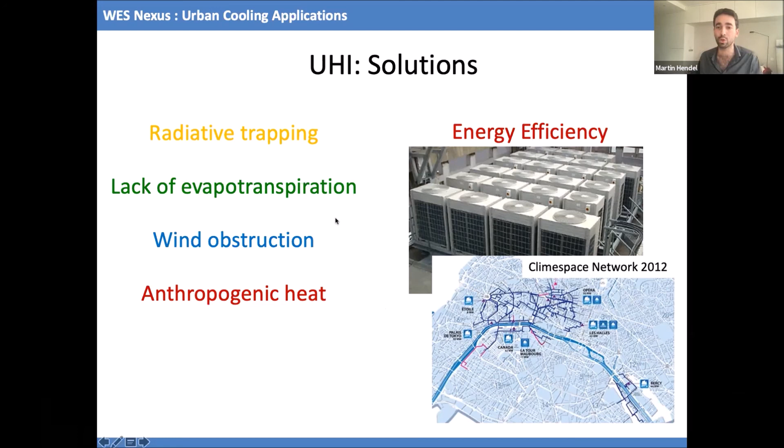And so among these solutions, if you want to address this lack of evapotranspiration, you can promote urban transpiration via what's called pavement watering. This is an example from South Korea, where they're actually using water that has seeped into underground subway stations with this spraying infrastructure built into the road system. They turn these things on three or four times a day, depending on the season and weather conditions. It's used in winter for cleaning, or it can even be used for de-snowing or de-icing, because it's quite warm water since it's underground.

Aquifers with a stable temperature - that's true for Japan as well. But it's used also in the summer to promote cooling.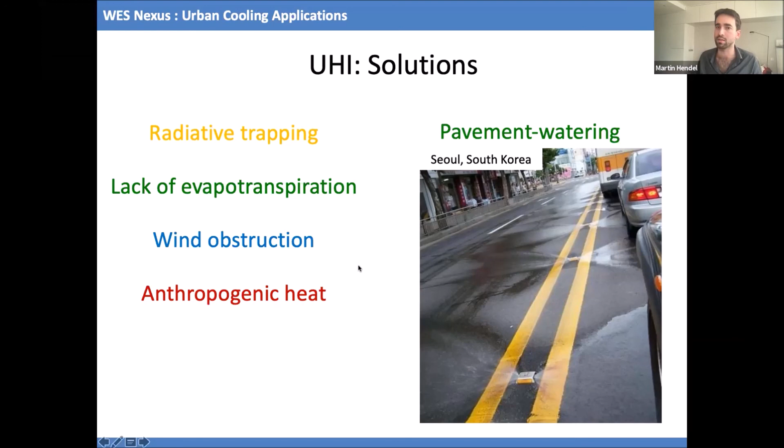This is something Paris has looked at quite closely. If we look back, we realize it's actually a very old practice. It's called uchimizu in Japan, and you've got these graphics depicting people in their summer kimonos, called yukatas. They've got their bucket, they've got their ladle, and they're going outside watering the public space in front of their shop, in front of their homes. It promotes cleaning, it promotes cooling.

And if you look around the world, you'll find that even in areas that don't necessarily have that much water, such as Rajasthan, people use - not the same quality of water, of course - but they will use their wastewater or gray water to try and keep dust clouds from forming, and to keep the space in front of their house or shop clean, cool, and welcoming.

Paris has done this in the past. At least as early as the late 19th century and into the mid 20th century, there are detailed maps written up by the engineers of the time, where they say which street needs to be watered, how frequently, depending on the weather conditions. The purpose is because at the time the streets were cobblestone paved, and in between the pavers there's dust accumulating all year round.

In the winter, when it's rainy and humid, that dust with the moisture is kept on the ground. But in the summer, when it gets dry, as soon as there's the slightest breeze, this becomes a dust cloud, and it's extremely uncomfortable for pedestrians. So a method and technique was developed at the time to prevent that. You've got these maps, and people like this guy connecting an old school hose to the non-potable water network.

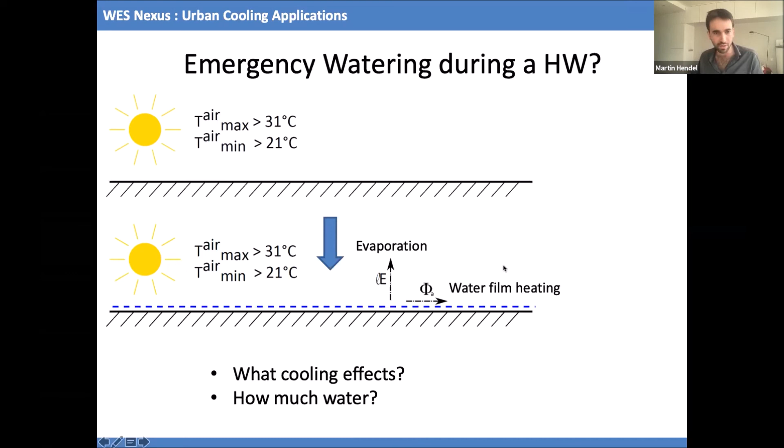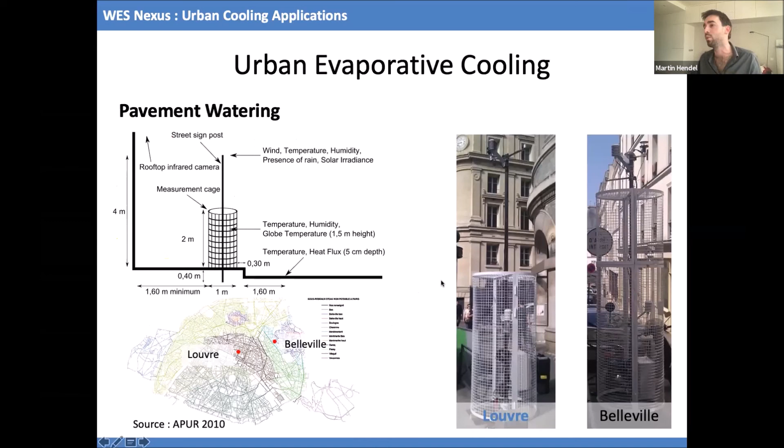I'll have to speed up a bit since I'm running low on time. We set up some experiments in Paris, which have now extended to larger scales and other cooling techniques, where we tried to quantify the cooling effect. We had two sites at the time, and with one we used a very experimental and simple watering approach with a cleaning truck, and then someone operating a manual hose just to water the sidewalk and pavement, in two different parts of Paris.

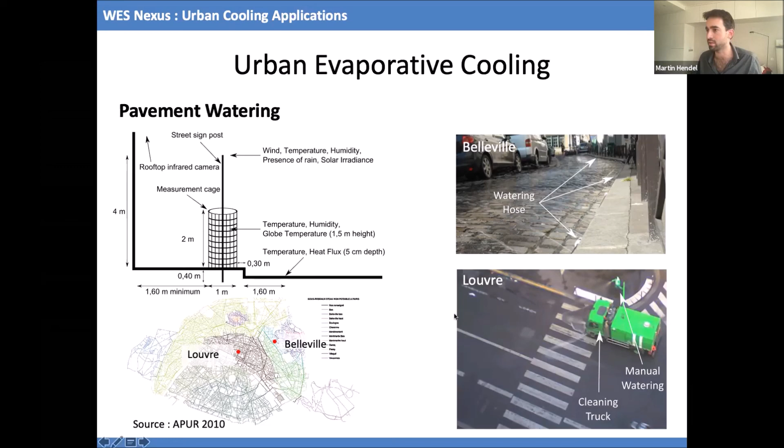Was it storing heat? Was it releasing heat? What we see comparing the red or orange days, which are dry, and the blue days, which are watered, is that you have much less of that heat absorption, heat storing factor from the pavement. And this did translate, as we hoped it would, into measurable improvements in thermal heat stress for pedestrians.

We look at an index called UTCI, the Universal Thermal Climate Index, which gives you a measure of thermal heat stress, really the indicator you should be looking at for health effects. You were getting up to 3 degrees cooling in equivalent UTCI temperature at the warmest part of the day. However, it had relatively weak impacts on urban heat island, but that's okay, because when urban heat island has the highest intensity, there's almost no one outdoors, since that peak is reached around 3, 4, 5 in the morning, and pedestrian traffic is really low at that time, oddly enough.

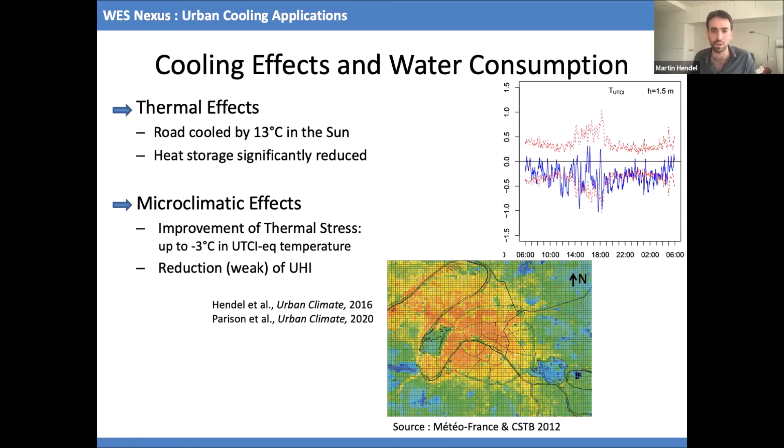This 3 degrees of cooling, this peak cooling, was being reached at around 6 p.m., which for us was the peak traffic time.

And then the last thing we were looking at was the water consumption. So what we found was that, unsurprisingly, the cooling was principally due to the evaporation of that water film. So you didn't need runoff to be forming at all.

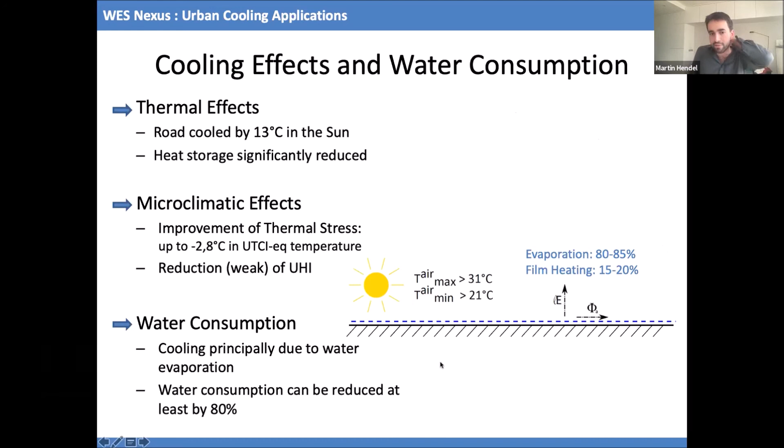This meant that, compared to our experimental conditions, we could divide our water consumption by 5. If you scaled this to target those 10% warmest areas that you really want to work on, this would work out to about 6,000 cubic meters of water per day, which is about 2.6 liters per day per capita—less than a gallon per person per day.

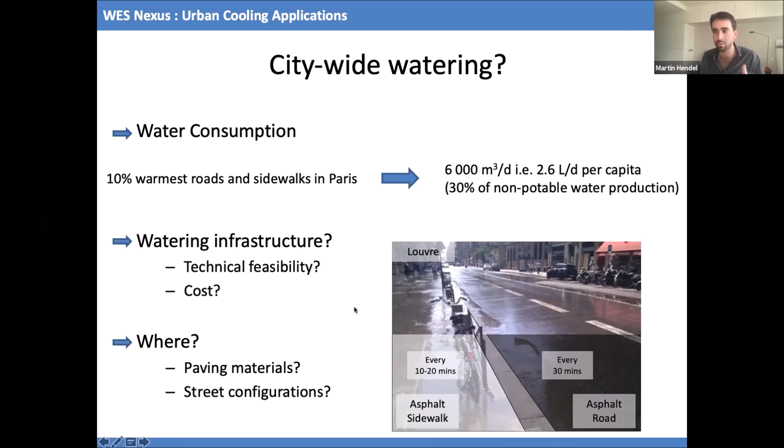Very quickly, we ended up having to look at different paving materials or urban materials, because we immediately saw that the road, made of asphalt concrete, was not behaving the same way as the sidewalk, which used a small aggregate or fine aggregate asphalt mix. So over time we developed expertise in studying these paving and urban materials in terms of their behavior under heat wave type conditions.

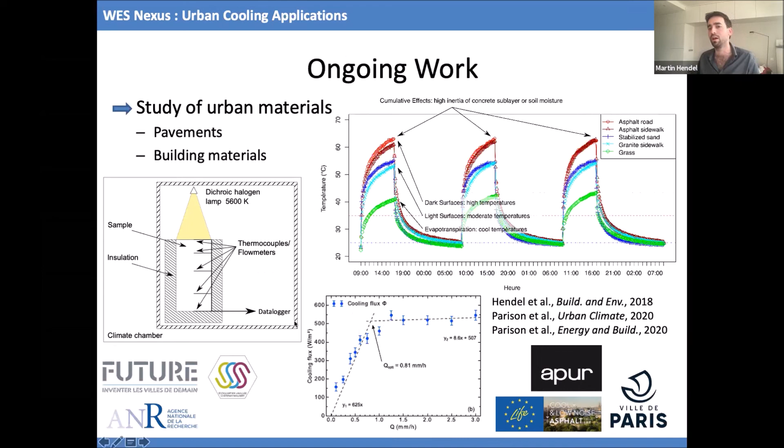We have a number of field studies—we've just gone over this one—but we now have some looking at new asphalt materials that are not only trying to be cool, but also trying to be quiet or low noise. We're studying about 10 of Paris's schoolyards, which are being turned from basically parking lots with trees to a more park-like design. And we've worked with some industrial partners on other ideas.

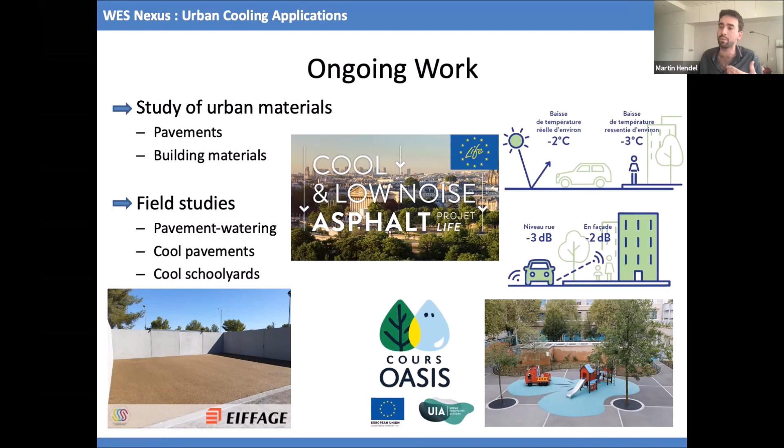We're able to look at different things in a time frame which is compatible with design work, because it's very quick. If you take 10 years to come out with 1 minute of data, then they've moved on to something else, and the design has been completely revamped.